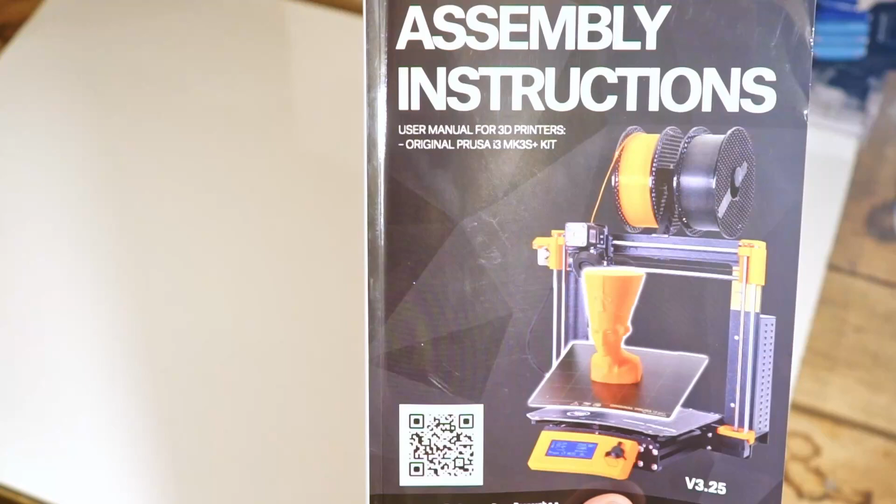Okay, today we are finally going to be assembling the Prusa MK3S Plus that I purchased a few months ago. It's ready, so let's take a look.

So the first couple pages of the manual, let's grab our tools that are displayed here, pull them out, and get them ready for work.

We'll take a look at the Y-axis assembly. That is the first step. We'll grab all of our pieces that we need, open up our boxes, and get our parts out. Get a little bit organized so that we can follow along the instructions. So we'll get our Y-axis parts bag there, get the parts that we need.

We'll open up the flat box here for the frame of the printer. Make sure that the yellow sticker is facing up like the instructions say. And we'll get our screws out.

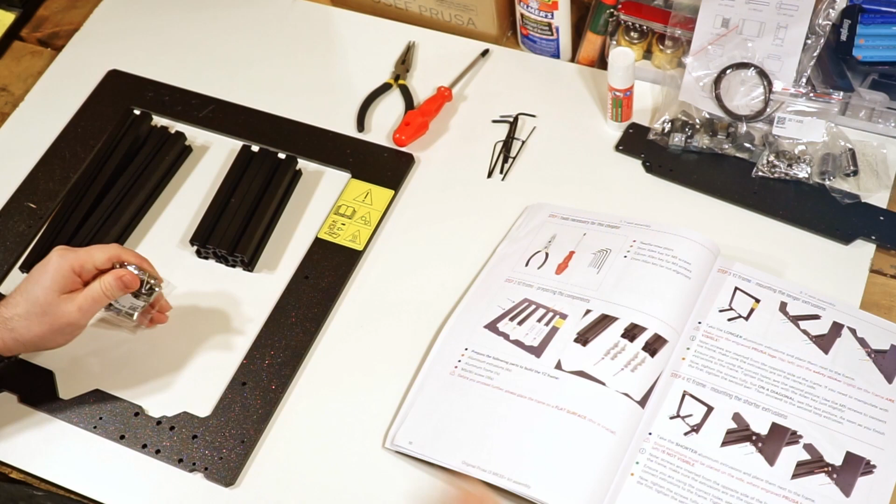Now it's very important here that you do read the instructions very thoroughly and very carefully, because they are done very well, and they're done very well for a reason. The assembly process is pretty complicated, but as long as you're following the steps in the manual here, you should be fine. Make sure you read the steps before you take action.

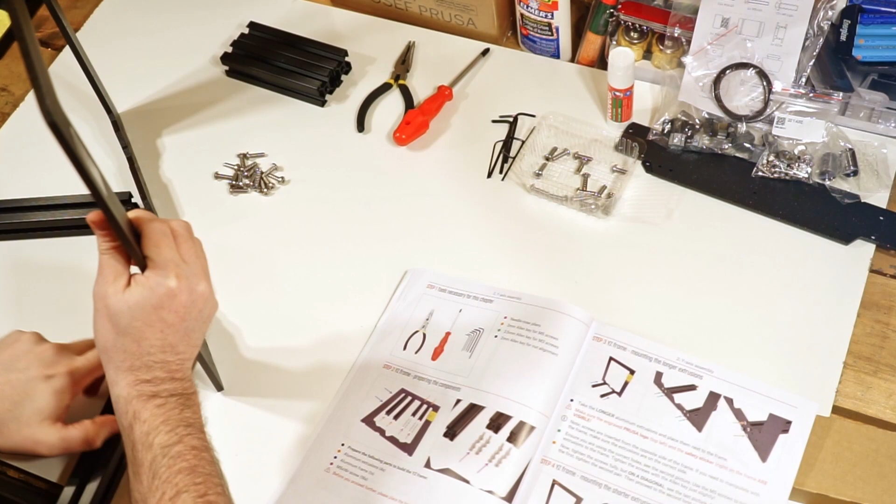So we're going to line up our frame, and we are going to put the screws into our extruded aluminum legs here to keep the frame standing. Tighten everything up.

We're going to spin the frame around, and we'll attach the shorter legs to the other side. A lot of these parts where I'm tightening up bolts and nuts, we will put in fast forward.

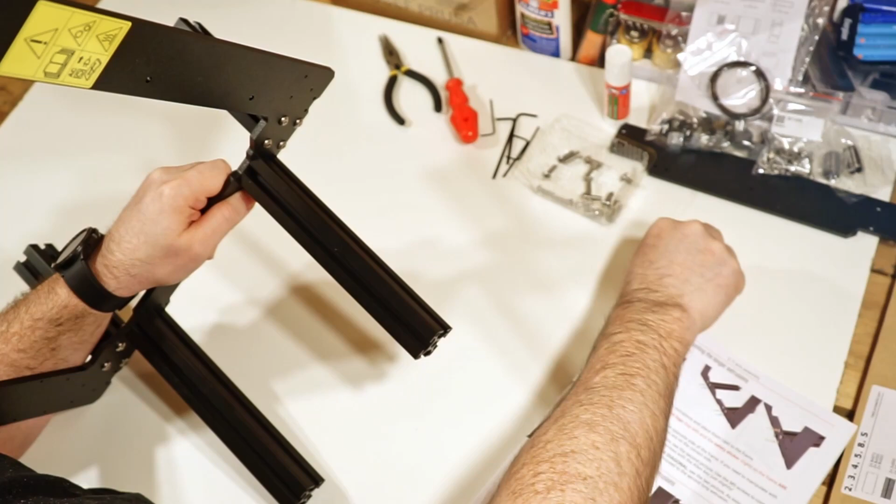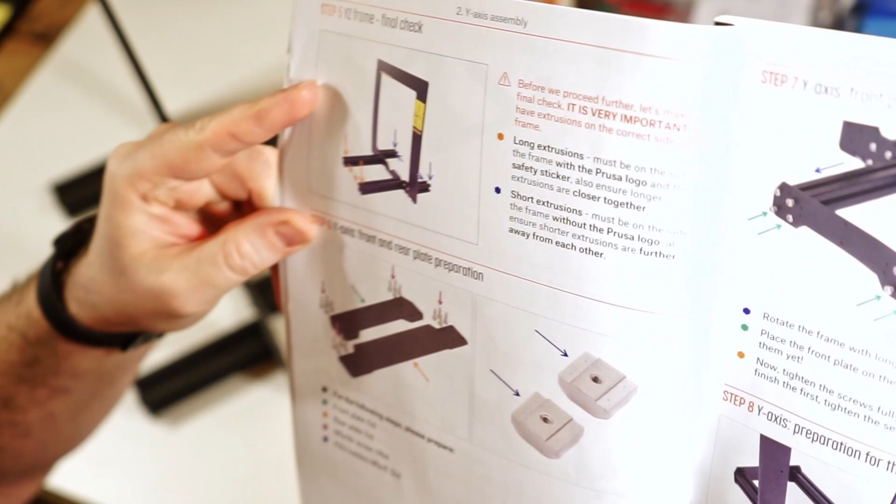All right, that's complete. The next step, we're going to attach the ends of the frame to the extruded aluminum legs, as these will add a lot of support and rigidity to the frame. They're pretty important. So let's get those pieces.

We'll take a look. There's two different pieces. One's longer, one's shorter, and they can really only be attached one way properly. So let's get that done. We'll tighten them in.

Now, if you read ahead in the manual, it does say do not tighten these fully. So you might see me loosen a couple of these just to make sure that they're not fully tightened, because we want to be able to balance the aluminum extruded legs so that the frame isn't wobbling on a flat surface.

So before we tighten on the other end for the short side, we'll grab these two pieces here. They're used to mount some pieces later on in the assembly to the frame. They are important. Put them in there before you get the end attached, or you will have to undo the end, and it might be complicated depending on how far down the road you realize they're missing.

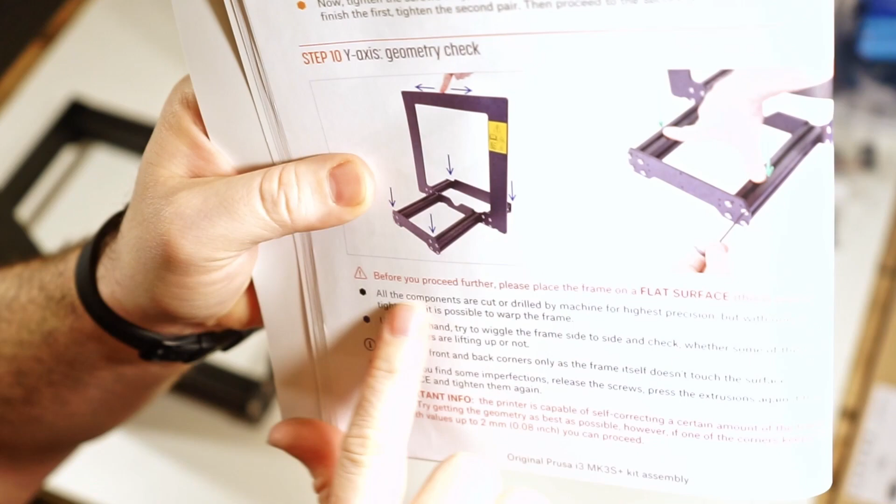So this is the part here I'm talking about, the wobbliness of the frame. We're going to push down on the corners here, make sure that it's not too wobbly. We'll loosen up the screws a little bit so that there's some movement in order to get it nice and flat. We can see here that it wobbles just very slightly from corner to corner.

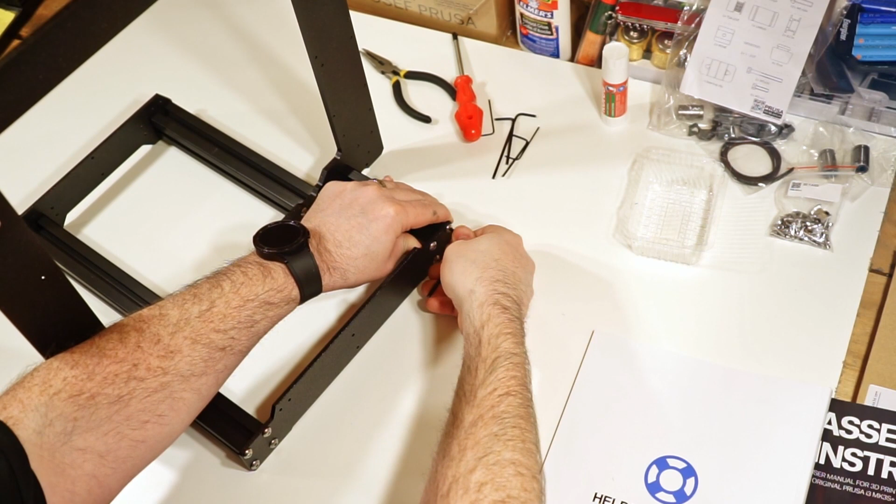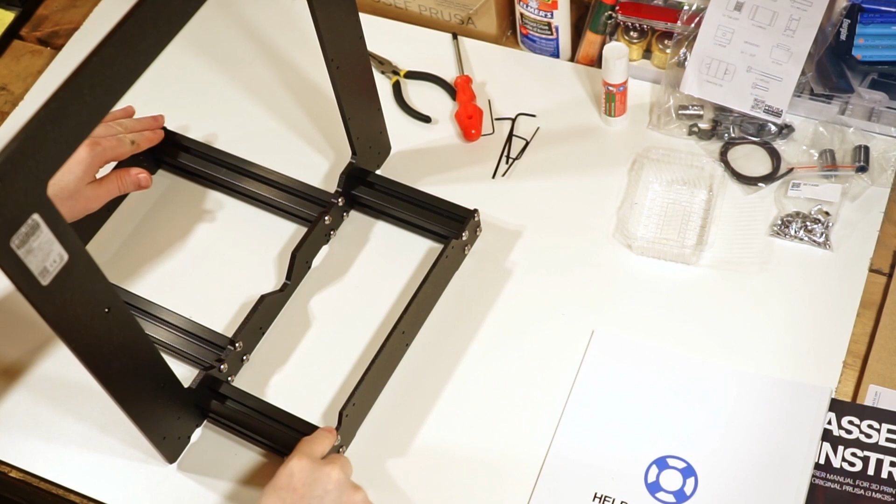So we will loosen up a couple screws, push it down flat best we can, and then retighten those screws so it stays flat. So we can see here the wobble has been reduced quite a bit just by loosening the screws. We'll go a little bit further and get it as low as possible by undoing the screws, loosening them a little bit on the other side, and then pressing firmly down as we tighten it up.

So in this step here, it's asking us to add the rubber feet to the bottom of the frame. And we're going to go ahead and do that, but then I will realize that in the manual, it kind of explains that it's going to be a little more difficult to rotate the frame around and work with it without picking it up. And this is just an old melamine IKEA cabinet shelf, so I'm not really too worried about scratching it up or damaging it.

It's just a spare thing that I have laying around, so I'd rather have the feet off so that we can easily slide the frame around and not have to pick it up every time. So let's take those off and move to the next step.

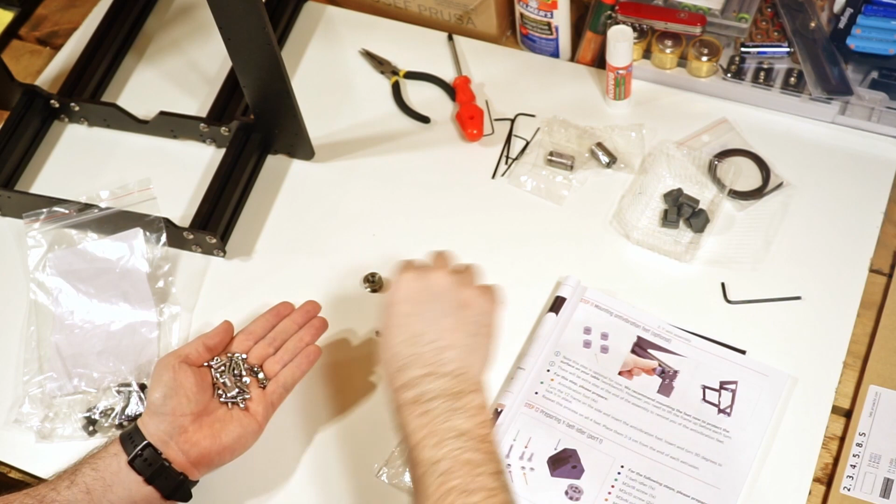So we're just going to lay out the hardware for the next step, which is going to be the Y-axis assembly, which is where the bed moves back and forth on the frame. So let's collect all the parts for that and get them out.

This is the Y-axis bag. It's got the plastic pieces in it. And from there, we will assemble these holders for the Y-axis belt and get them attached to the frame. So we can see here the Y-axis belt holder. That's going to mount to the front of the frame.

And we're going to put the hardware that's needed inside of that. It gets a little bit finicky because your fingers can't fit inside the slot there. So I'm going to use the pliers that came with the Prusa to assemble it.

Sometimes you'll find that the holes on the plastic pieces are a little bit tight. So what we're going to do is pre-screw them in so they take out any little plastic leftovers from printing. This makes it a little bit easier to get them in and out and get them screwed in properly.

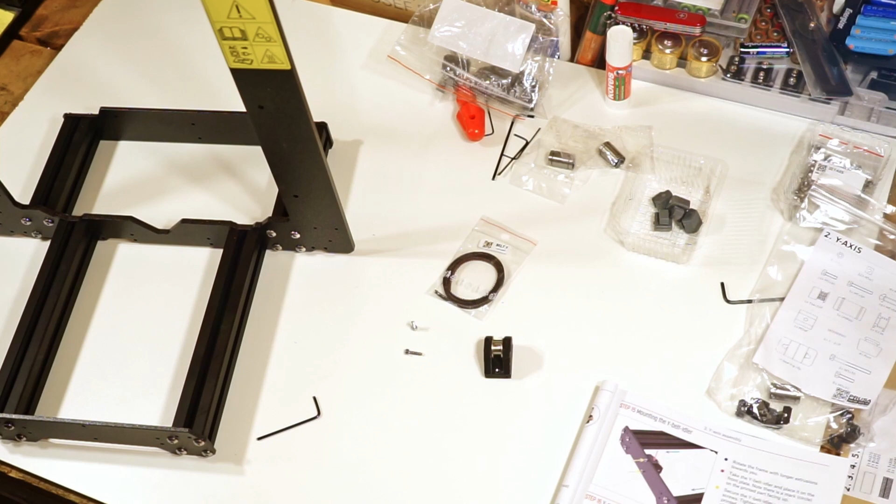Now that we have the belt carrier assembled, we'll go ahead and attach it to the frame. We see a little screw hole here, which indicates the position that we should place it in on the frame. This is all noted in the assembly manual.

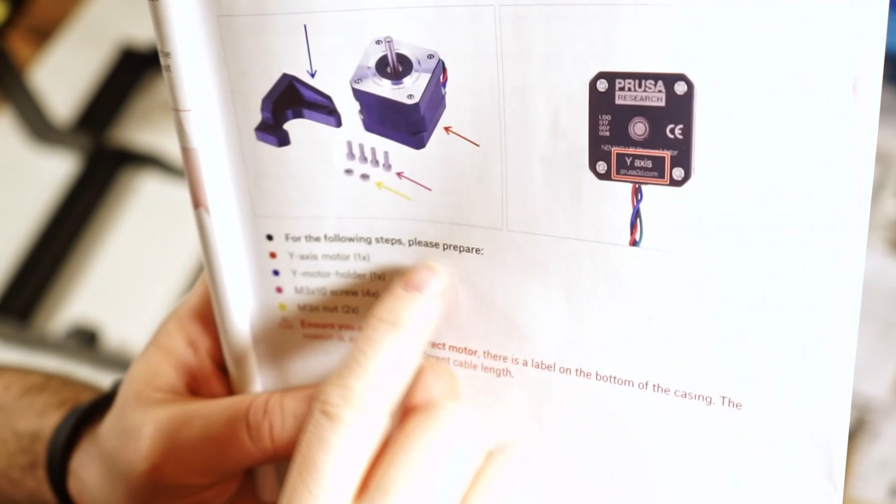Now we finally get to work on our first motor, the Y-axis motor, and we'll be putting that together with the plastic printed parts provided.

Just make sure that when you're looking through the box, you pick up the right motor. It does say on each motor what it's for, and so does the manual, it should have it highlighted, so make sure you grab the right one.

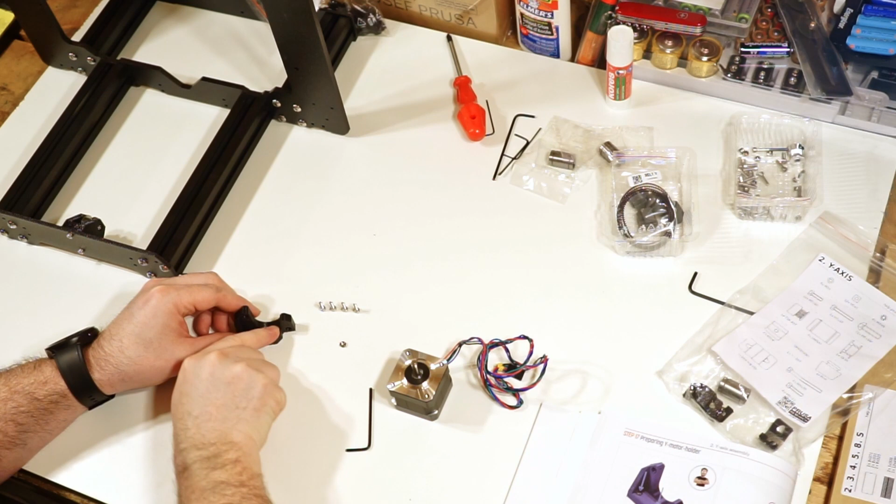There's a couple of nuts that need to be attached to the 3D printed part so that it will attach to the frame. Then we attach this piece to the motor, making sure we get it in the correct orientation as shown in the image provided in the assembly manual.

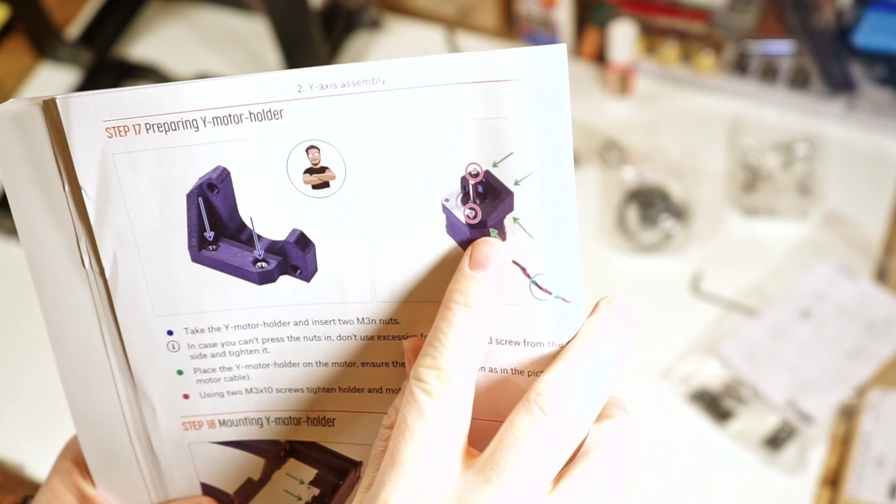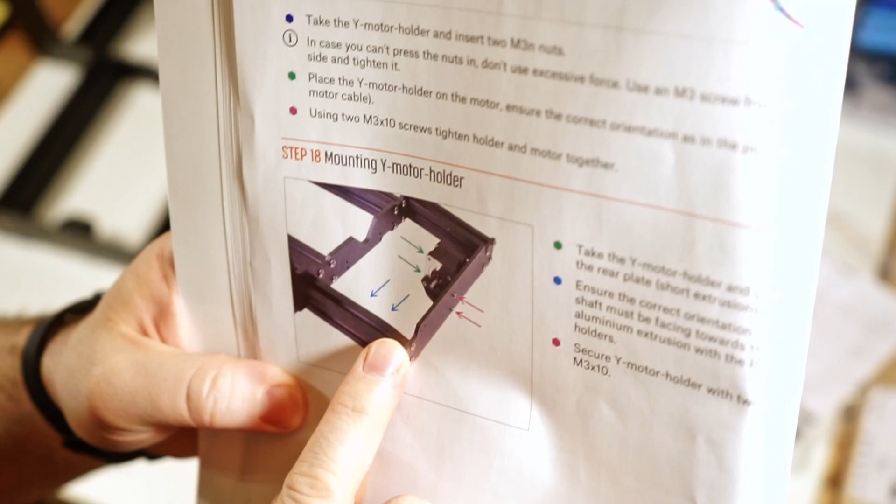Now we'll be able to attach this to the back of the frame, opposite where we attached the belt carrier.

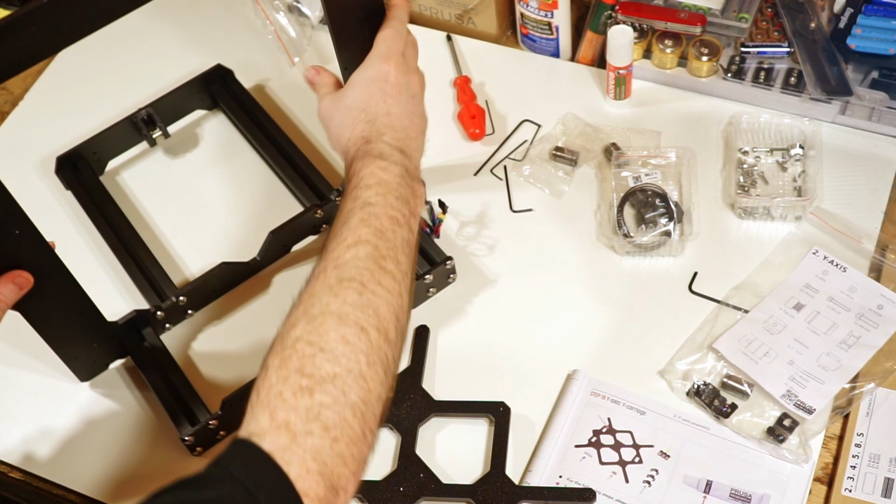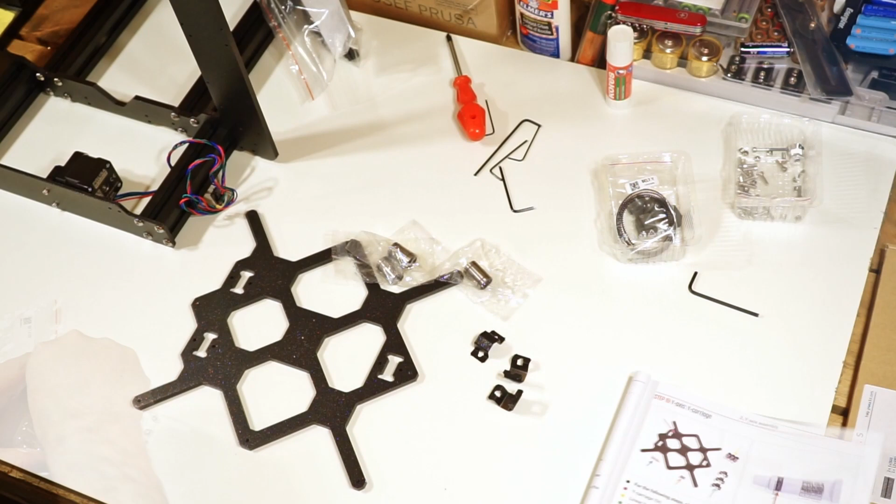Now we're on to the bed of the printer. This is actually just a frame for the bed to sit on. It's where the rails will attach with the bearings, and it will slide on those rails. So we'll get the bearings attached to the bed frame, then attach the bed frame to the rails, which will be mounted to the frame we built previously. Let's get our parts out and put everything together.

This bearing comes in a package of oil, pre-oiled and sealed shut. So when you open it up, you'll want a napkin or paper towel or something to dry out the outside so it's not too slippery to handle.

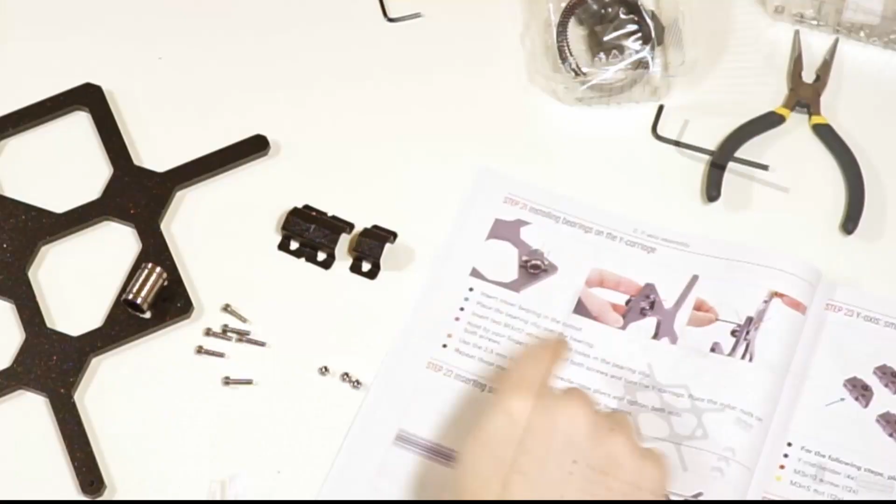You can see inside there, the bearing holder - you want those to sit in a specific orientation on the frame, so that when they're sliding on the rails, they're sliding on those bearing surfaces in the most efficient manner possible. That's how you get longevity out of your bearing slides.

The bearings are just held on with these straps that are screwed down to the frame. They're a little bit finicky to get on if you put the strap on first and then try to screw the bolt through into the frame. You'll see the next one I do, I put the bolts on the strap first and then put those through into the frame - it was a little bit easier that way.

To hold the nut still, I used the provided pliers so that it didn't spin while I was turning the bolt.

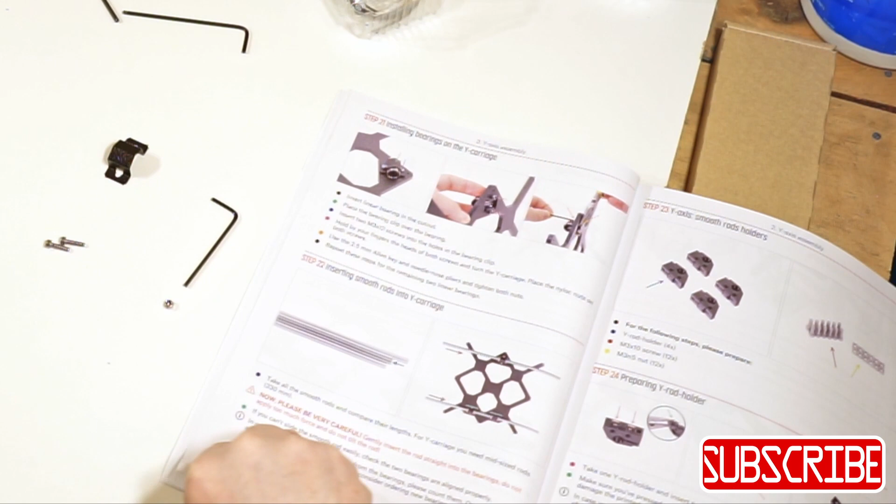Then I realized I don't have enough nuts, so I checked to make sure that I'm supposed to have more nuts than this, and grabbed them. So let's get the nuts attached.

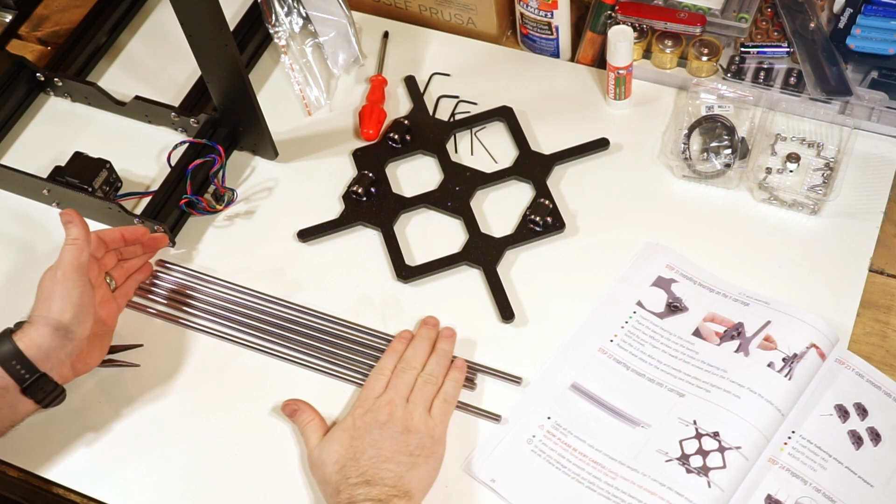Okay, all the bearings are attached. Now we'll need to grab the rails, and the instructions say we need the medium ones, so let's sort these out. We'll grab the medium ones here - these are the ones that we're going to use.

We're going to slide them through the bearings very carefully. The instructions do indicate that the bearings could knock loose some ball bearings within there, so just be careful sliding those through - do it delicately. You'll want to aim as straight as possible through each bearing, so you're not twisting or bending anything.

These are the end caps, or attachment points, for the rails to get them mounted to the frame. So we'll need a lot of bolts and a lot of nuts, and they'll go on each 3D printed rail holder.

The nuts used inside of these 3D printed parts were the square nuts, and they were a little bit tight fitting in here, so I had to use an Allen key, and then I ended up tapping these on the table to get the nut inserted enough into the part so that we could line up the bolt when we attach it to the frame.

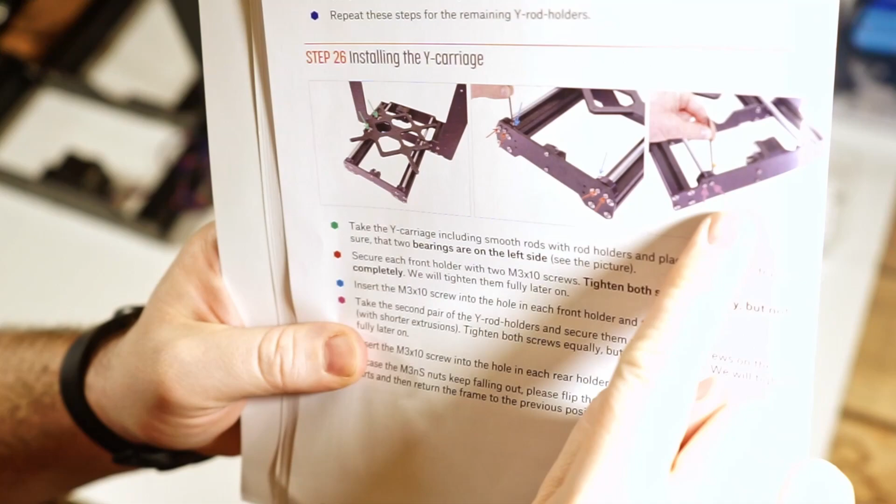We can see here, each 3D printed part to hold the rail needed 2 bolts. Now that they're slid onto the rails, we can go ahead and attach these parts to the frame.

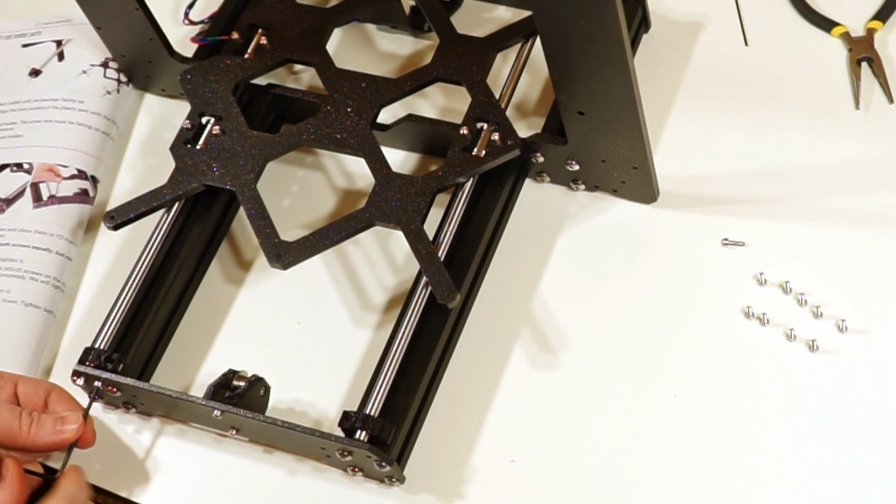You'll see here that I couldn't quite get the bolts screwed into the nuts in these 3D printed parts, because I wasn't able to press the nuts far enough into the part. So now I'm using an Allen key to try and push them a little bit further, sticking the Allen key into the side hole and using a little bit of leverage to get them down.

After I do that, they go ahead and get bolted in quite easily. It's just a matter of making sure that the bolts and the hole in the 3D printed part are aligned properly.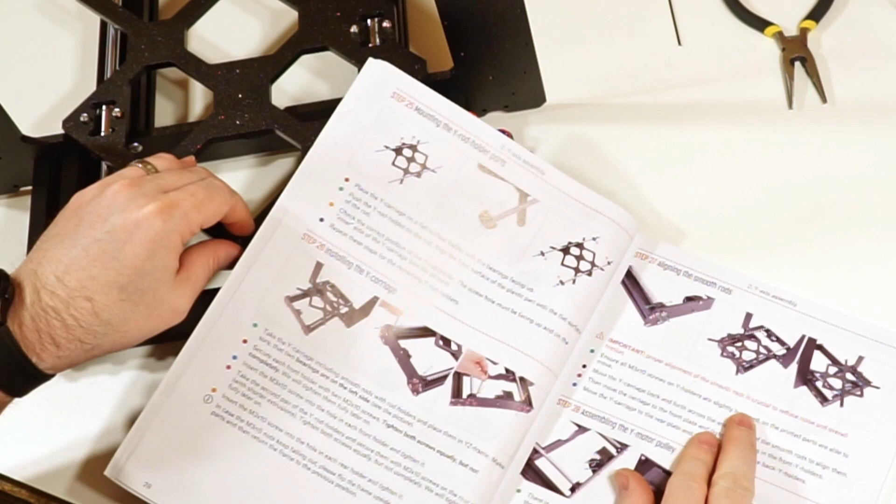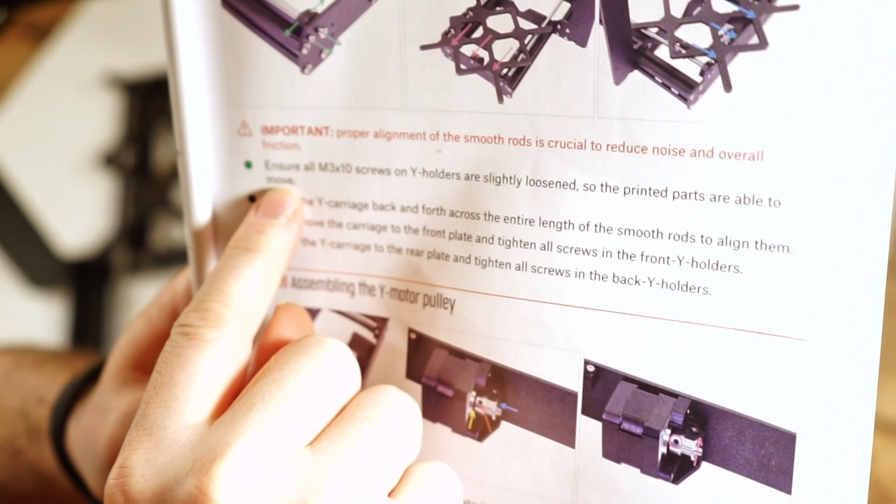So I'd gone ahead and tightened all the bolts for the rail holders. Then when I read the manual, I noticed it said to make sure they're slightly loosened, because we are going to slide the bed on the rails back and forth a few times to make sure it's riding straight and clear on both sides.

Once we've done that, you can actually hear a difference in the way it slides back and forth. It's a little rough at first, but once we slide it back and forth a few times and tighten everything up, that rough sound gets quieter and the feeling gets much smoother.

Now that we've put some pressure on it and driven it back and forth quite a few times with some pressure, we can go ahead and tighten up those bolts.

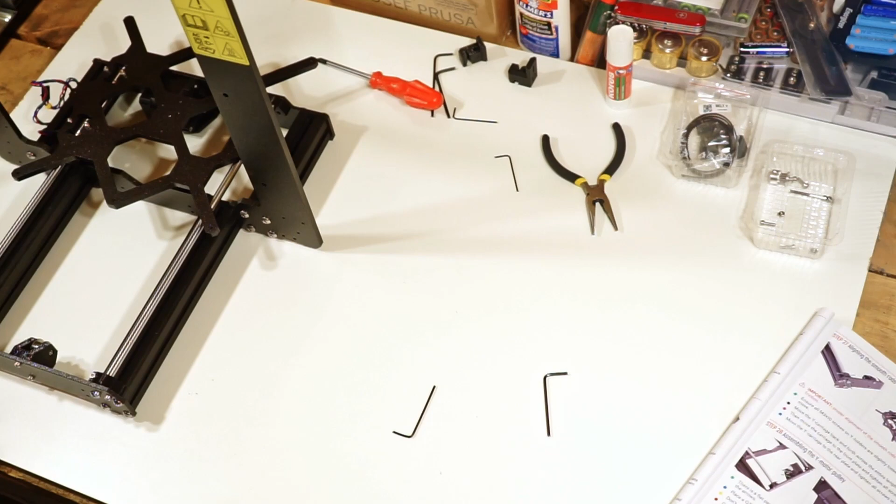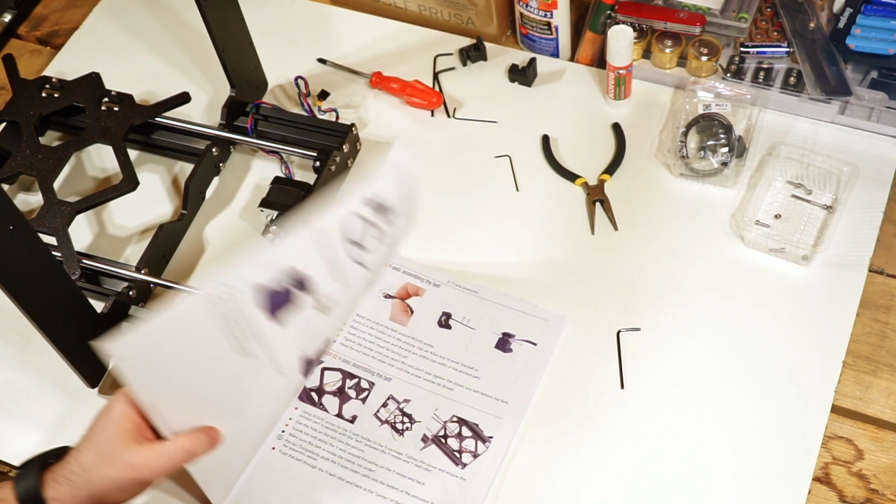Here we'll just attach the belt gear onto the motor, and this is what's going to drive the belt back and forth. We attach it with a grub screw to the gear. It's pretty straightforward—there's a flat spot on the axle of the motor and a grub screw on the belt gear holder that tightens down onto that flat spot, holding it firmly to the motor's axle.

These two 3D printed parts are the belt tensioning system. We're going to attach the belt to these two plastic pieces, which will be attached to the bed frame, and use a bolt in between the two to tighten them towards each other, which will in turn tighten the belt.

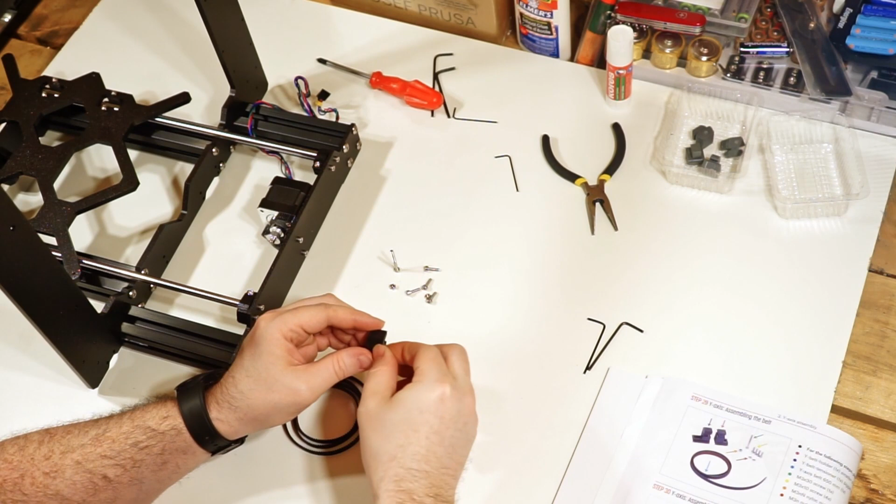Here I was having a hard time getting the nut to seat firmly into the printed part, so I put the bolt through and used that to pull the nut back into the part, then unscrewed the bolt. The belt attaches to the 3D printed parts using a bolt, with the belt looped around it and pinched into the plastic part.

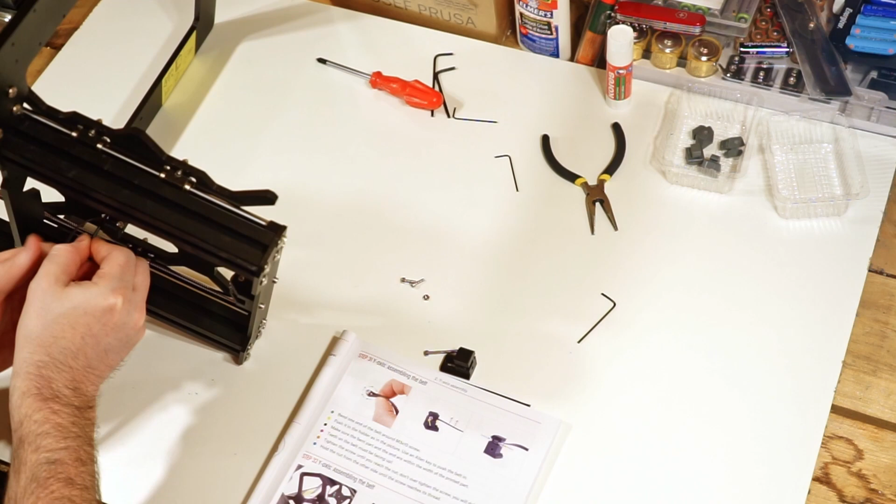Once we attach the 3D part with the belt pinched on it, we have to guide the belt around to the motor, through the frame, and back around to the belt carrier on the other side, then attach the loose end of the belt onto the other belt holder. We will screw that into the frame and attach the two pieces together with another bolt that tightens them together, creating tension on the belt.

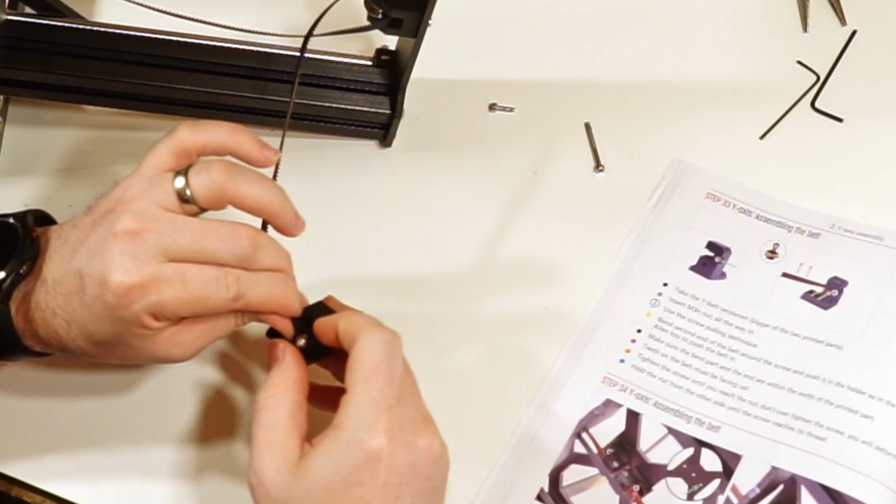So you'll see here how much of a loop I made. I did take this back out because there wasn't enough slack in the belt to get the part attached to the bottom of the frame. So I had to undo this, make the loop smaller, and redo it so the part could be attached to the frame with enough tension to tighten them together.

This is where I realized there isn't enough slack in the belt to properly attach these two tensioners together, so I decided to take this apart and make the loop smaller.

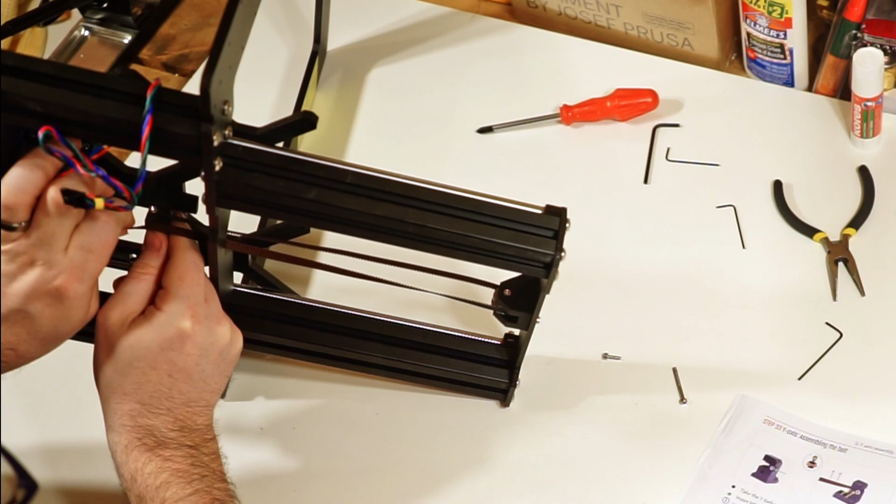After making the second tensioner loop smaller, I also realized I had to go back to the first one and make that one smaller as well.

Now that we've shortened our loops on each side of the tensioner, we can attach them together and get them attached to the frame. The bottom screw that goes into the frame shouldn't be tightened too much, since there's a slide hole in the plastic printed part allowing it to move back and forth. The tension actually comes from a bolt that attaches both plastic pieces together, and as you tighten it, it pulls them together, creating the tension.

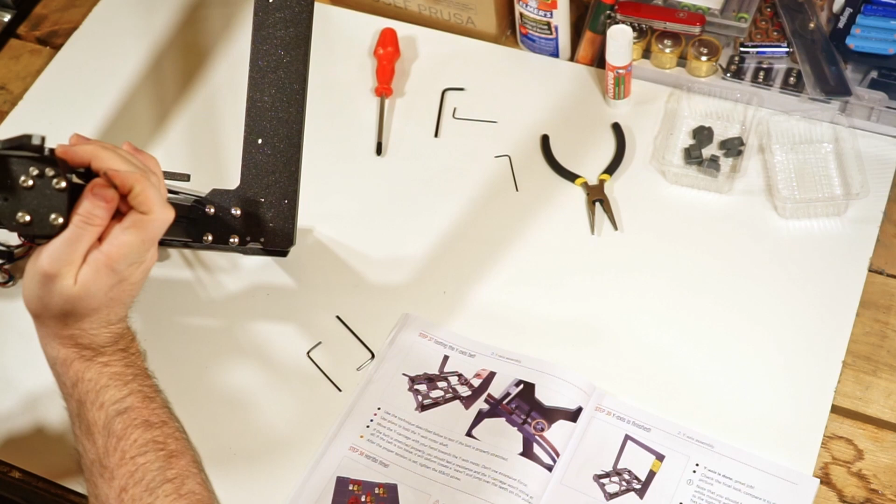So here I'm just sliding the bed back and forth to make sure there's enough tension in the belt that it doesn't skip any teeth on the motor mount gear. Then I'll go ahead and tighten up the bolts attached to the bottom of the bed.

That's it for part 1 of this assembly series. We can finally dig into some gummies.